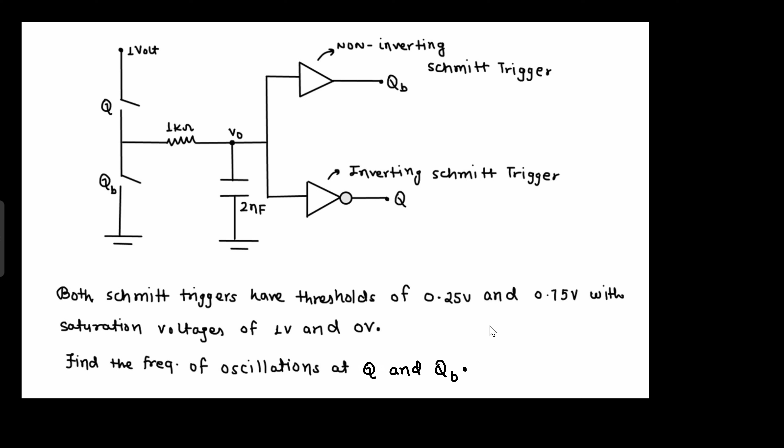So in this video we are going to solve a very good question on analog electronics, or you can say it will require the concept of transient analysis as well. So analog and network both combined are there. Okay. Now the thing is, there is 1 volt of battery. There are two switches, Q and QB switches are there.

Then there is this RC circuit, and the capacitor is having a voltage of V0, and that V0 voltage is fed as an input to non-inverting Schmitt trigger and inverting Schmitt trigger, and those non-inverting and inverting Schmitt triggers are giving Q and QB as output. So those Q and QB are running those switches. Are you getting this point?

So output of Schmitt trigger could be either 1 or 0. And what does that mean? If QB is 1 or Q is 1, that means switch is on. If both are 0, that means switch is off. Basically, Q equals to 1 will turn this switch on. If Q equals to 0, then it will be off. If QB equals to 1, then it will turn this switch on. If QB equals to 0, then switch will be off. So I hope the question is clear.

They have given the threshold voltage of Schmitt triggers as well, that is 0.25 volt and 0.75 volt. And saturation voltage is 1 volt and 0 volt. What does that mean? Their output could be 1 volt or 0 volt. You need to find the frequency of oscillations at Q, QB, or they could have asked at V0 as well. Now in this question, I did not give the characteristics. I have just written the name, non-inverting Schmitt trigger.

So yesterday I took a session on op-amp in positive feedback. There I told you it is not necessary that they will give you the characteristics. They can directly write down the name as well. In GATE 2021, there was a question in electrical. There they did not give the characteristics. They just told that it is an inverting Schmitt trigger, and then they gave the threshold voltages. That's it. And they also told the saturation voltages as well. So it is not necessary that characteristics will be given in the examination.

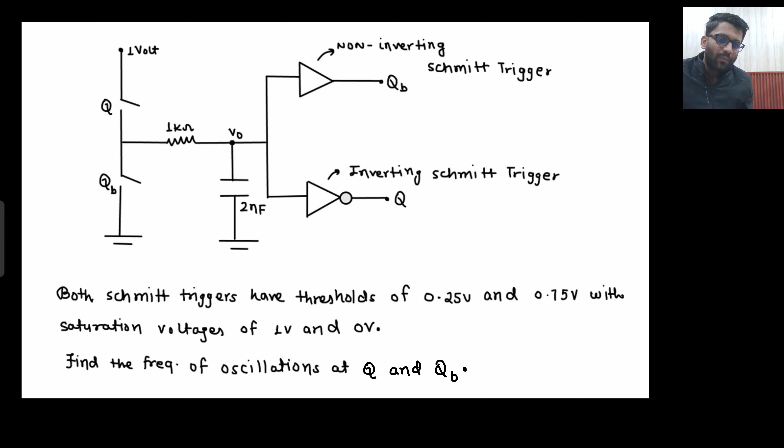Look here, the input of Schmitt trigger is V0, right? So here I am writing V0. And output of non-inverting Schmitt trigger is QB. So here I am writing QB. Are you getting this point? Then if it is a non-inverting Schmitt trigger, what do you mean by non-inverting Schmitt trigger? That for higher voltage it will give higher output, and for lower voltage it will give lower output. Right?

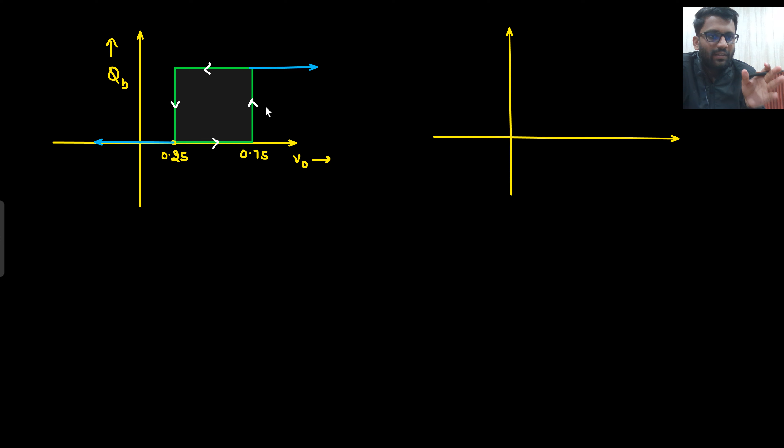In that manner. Okay. And what will be the direction of rotation? Since it is non-inverting, that means direction will be anti-clockwise. Let me use another color of pen. Non-inverting will have anti-clockwise direction, because I told you whenever we take angle we go anti-clockwise. Whenever we talk about nothing that is being inverted, that means if we are talking about positive, that means anti-clockwise.

So this is how I will make the characteristics, and here both signs of arrow will come. So this is the characteristics of a non-inverting Schmitt trigger, and you should know how to read these characteristics. That also I have told. You will work from here to here in this manner, and then you will work from here to here in this manner.

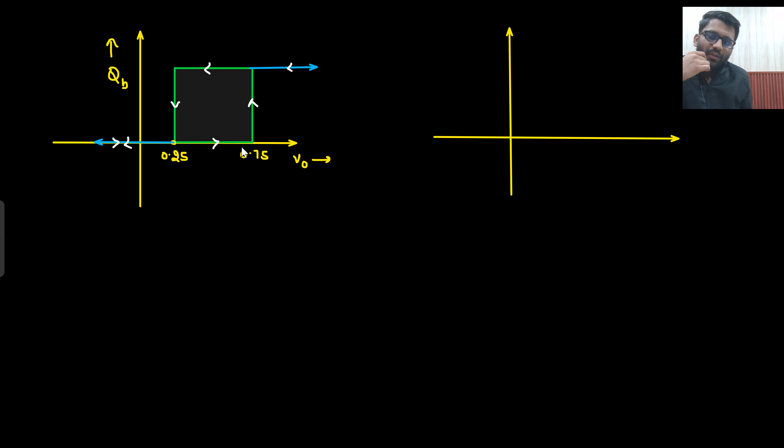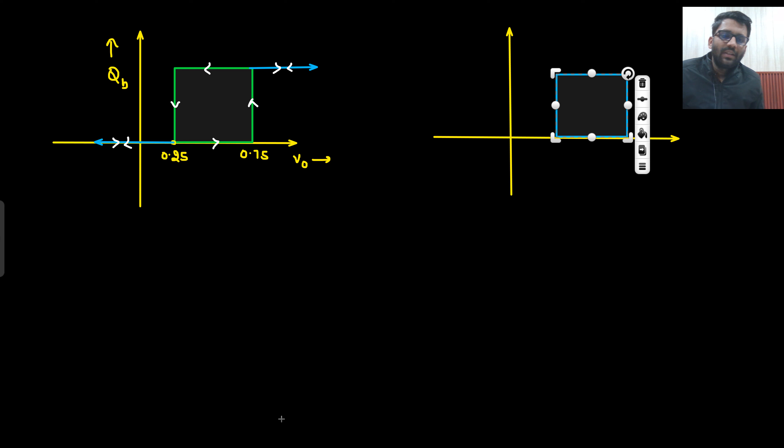Okay. Here both kinds of arrows are there, so both kinds of arrows we are making. Right. Now let's make the same for the inverting Schmitt trigger as well. For the inverting Schmitt trigger this will be the same, but this difference will not be there. Both will have the same threshold voltage, but the difference is that it is an inverting Schmitt trigger.

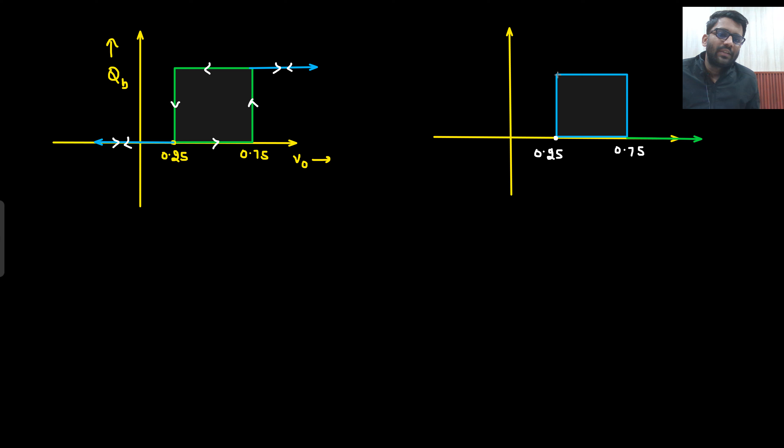What is the meaning of inverting Schmitt trigger? For a higher value of voltage you will get lower output, for a lower value of voltage you will get higher output. And how will the rotation look? It will be clockwise, right? Okay. And here both signs of arrow would be there. Positive output is 1, lower output is 0. So this is the characteristics.

Now what is the initial condition? Initially there is no charge on this capacitor, so this is having 0 volt. This 0 volt will be fed here, and here as well. So if input is 0 volt, that means if V0 is 0 volt, this guy is saying QB should go to 0, and this guy is saying that Q should go to... what is this output? This is your Q.

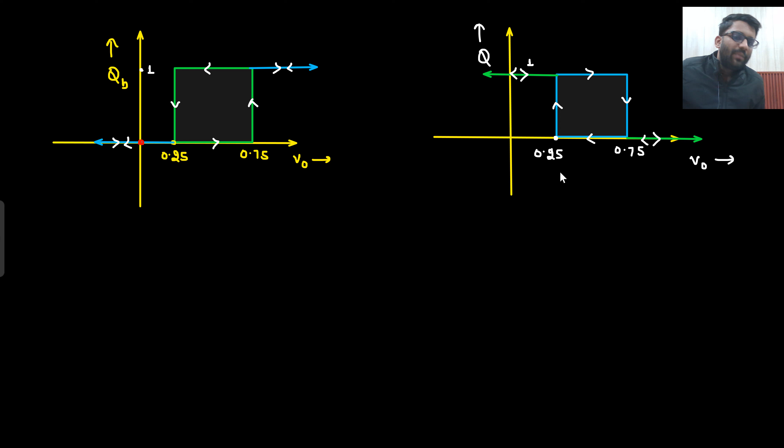Ambiguity will be there when you are in the dead zone. But now if your V naught is 0 volt, then QB is saying your output should be 0, and Q is saying that I should go to 1 volt. So at the initial condition, this guy is going to 0 volt and this guy is going to 1 volt.

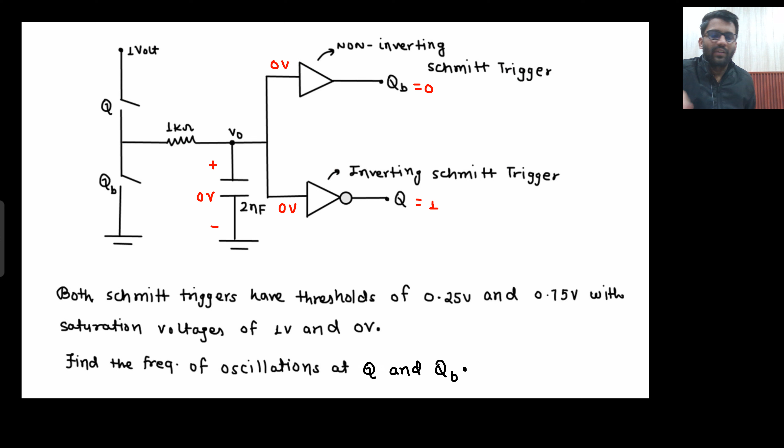Wait a second. What is the issue? Okay. Sorry, I just made it opposite, right? QB is saying to go to 0 volt. Yeah, and Q is saying to go to 1 volt. Okay, fine, it is fine only. So QB is saying to go to 0 volt, that means it should be open. And Q is 1.

That means it should be closed, this will turn on. Q is 1 means it will be closed, it will turn on. So now 1 volt will be coming here; basically this switch will be turning on now. Now what will this 1 volt do? Look, this will be made from an op amp, so this will drive 0 ampere current. These are ideal, so they are driving 0 ampere current.

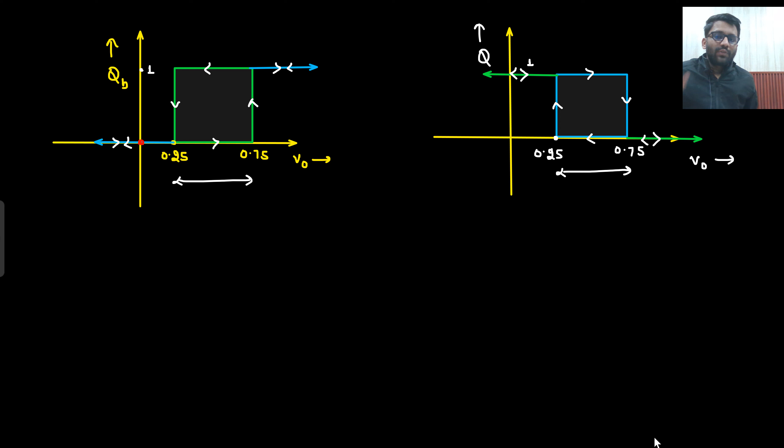So because of 1 volt, whatever current flows will flow from the capacitor only. So now this 1 volt will charge the capacitor, and the capacitor will develop some charge. That means your V naught is going up, from 0 to a certain value. So if your V naught is going up, you are moving in this direction now.

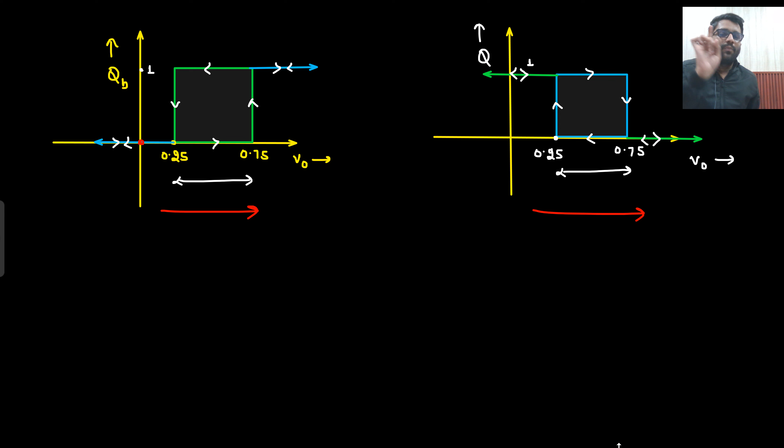So which characteristics will you follow? If my V naught is going up, this characteristics I will follow. Here I will follow this characteristics and here I will follow this characteristics. So what are both of the characteristics saying? Both are saying that the transition will be at 0.75.

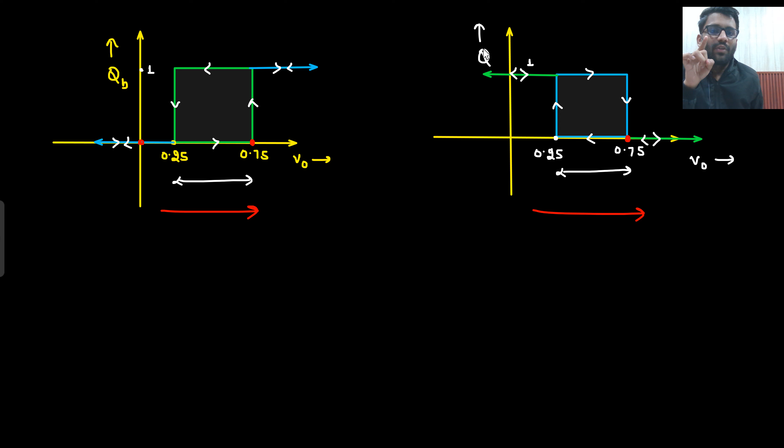So both of the characteristics are saying that if your V naught is 0.75, at that point there will be a transition. Until you reach 0.75 volt there will be no transition. That means till that point your Q will be 1 and QB will be 0 only. Say yes or no. Right? All good? All fine? Okay.

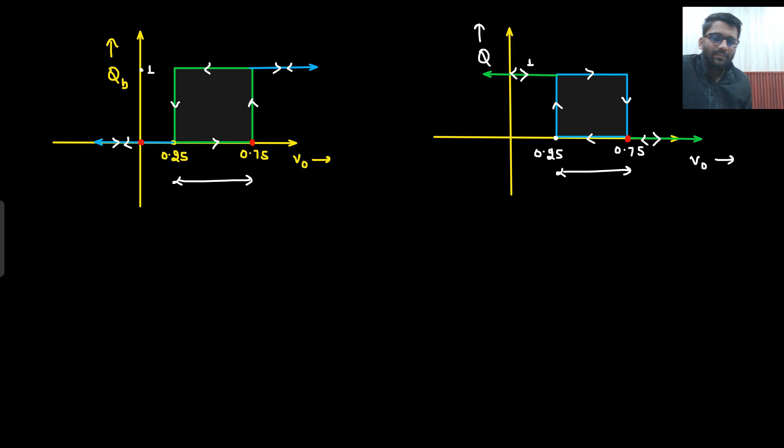So now the scene is, your V naught will start developing the voltage. Your capacitor can see that 1 volt is applied. So your capacitor will start developing the voltage.

It will try to go up to 1 volt. So your capacitor will try to go up to 1 volt. And what is tau here? Tau is RC. 2 nanofarad, 1 kilo ohm. That will be 2 microfarad. Sorry, 2 microsecond. So this will be the same.

But there is a transition at when your V naught becomes 0.75 volt. So till the point 0.75 volt we need to analyze, because after that there is a transition. That means after that the circuit condition is changing. After that what will happen? QB will say that I will be 1 and Q will say that I will be 0.

That means QB will say that now I will be turning on and Q will say that I will be turning off. So circuit condition will change. So capacitor equation will also change. So until the point we reach 0.75 volt, till that point we need to analyze it. Are you getting this point or not?

Here the concept of multivibrators is being used, but don't think anything. Even if you don't know what a multivibrator is, still you will be able to solve the problem, because this is a simple RC circuit, charging, discharging. Multivibrator is nothing but a Schmitt trigger with an RC circuit, nothing else. That's why I took this question, so that your concept of multivibrator gets cleared.

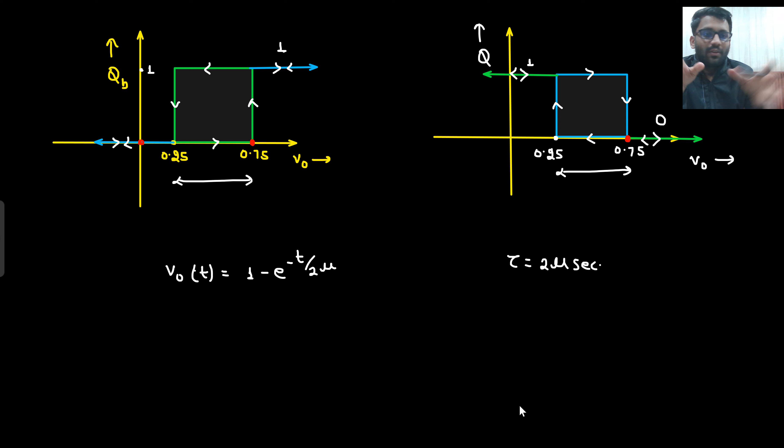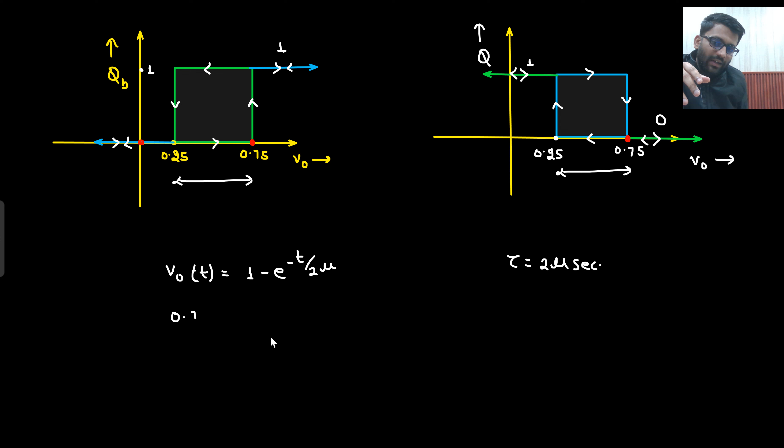So what is happening here? Until you reach 0.75 volt, there is no change in the circuit. That means capacitor is getting charged. But after 0.75 volt, there is a change in the circuit, so circuit condition will change. After that, we need to analyze again. So now capacitor is developing the voltage. But till what point? Until it reaches 0.75 volt. Okay.

So now till what time? This time you can calculate: ln 4 into 2. So this time is 2.77 microseconds. So what do you see? Initially your capacitor is getting charged. Your V naught is getting charged, and it was charged till 0.75 volt.

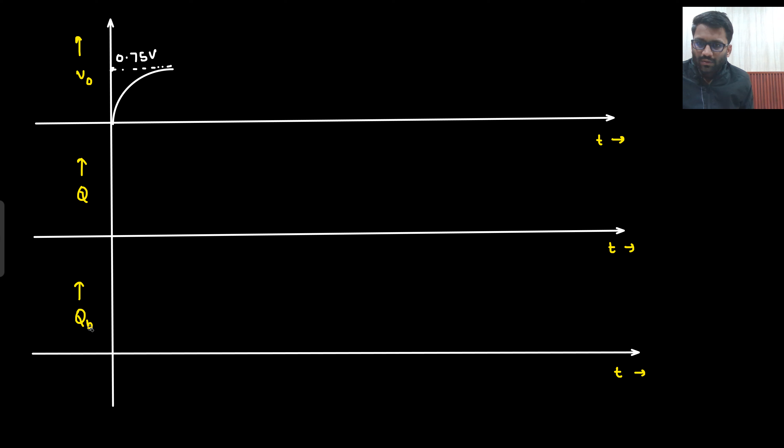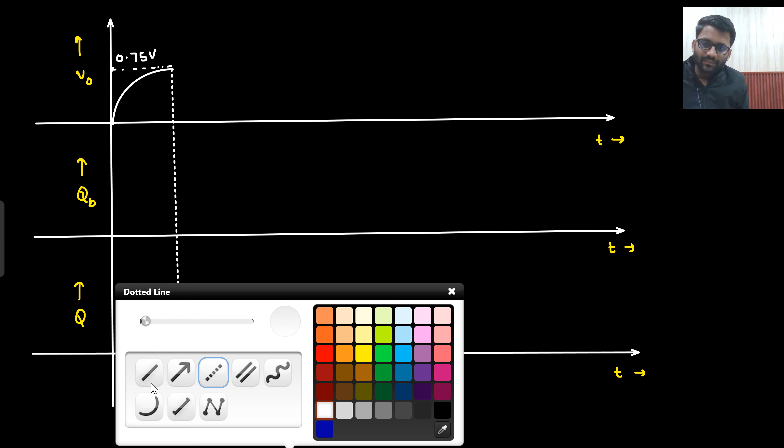And in this condition, what was the condition? Your QA was 0, I guess. Sorry, QB was 0 and Q was 1. This is your QB and Q. So till this particular point, your QB was 0 and Q was 1. Right? Let's see what happens next.

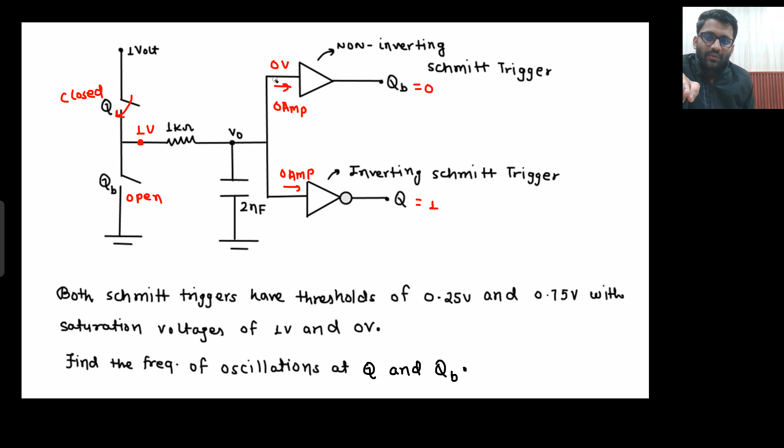Now, just as it goes above 0.75, now the capacitor is charged to 0.75. Okay, let's remove this 0 volt. This I already know will drive 0 ampere current. Let's remove this off as well. So this 1 volt was there, but now it is charged to, let's just say, 0.76 volt. So now at 0.76 volt, what will happen?

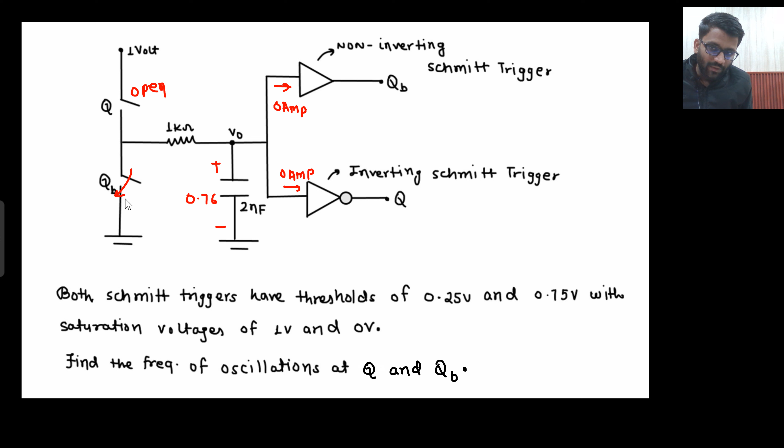At 0.76 volt, QB will say, sir, I will be 1, and Q will say, sir, I will be 0. That means Q will be open now, and QB will be closed. So now here only 0.75 volt reached. 0.76 did not reach. After 0.75 only, they started saying I will be open and I will be closed. Now what is the equivalent circuit here?

This end of the resistor is connected to ground, right? So this has become a simple RC discharging circuit. Now from the capacitor, current will flow and it will discharge the capacitor. This is the only path, because the input of the op-amp will drive 0 ampere current. So the capacitor will discharge through 1 kilo ohm only.

So now it will keep on discharging. That means my V0 is going low. Capacitor will try to discharge completely. So from 0.75 volt, it will try to go to 0.

But will it be able to reach 0? Let's check that out. So what will happen? Now your input is decreasing. Now you are going from 0.75 volt to 0. So that means you are moving in this direction. So which characteristics will you follow? This characteristic you will follow. You are moving in this direction, right? So this characteristic you will follow now.

So in this characteristic, where is the transition? The transition is at 0.25. This characteristic was there, and here this characteristic was there. So where is the transition? The transition is at 0.25. Right? So now your V0 will go down till it reaches 0.25 volt. So initially, at 2.77, your V0 is having 0.75 voltage.

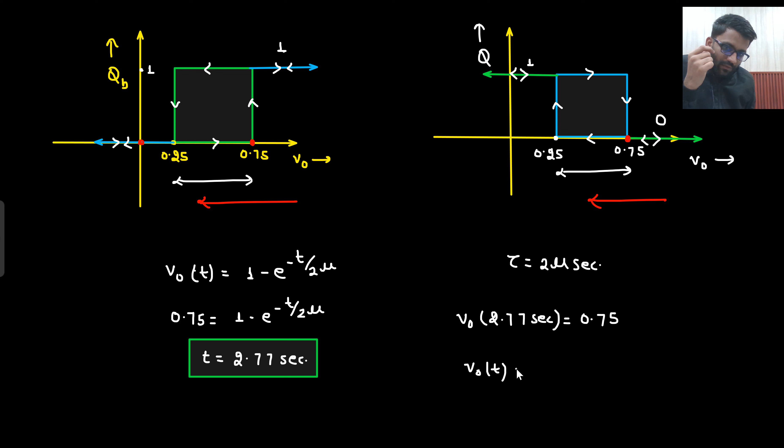Now what will be the equation of V0? V0 will try to go from 0.75 voltage to 0 voltage. So this will be the discharging equation. It will try to go to 0 voltage, but from where are we starting our circuit? We are starting our circuit from 2.77 microseconds. Since we are starting our circuit from 2.77, here I will put 2.77 microseconds.

Although it is not required to put this 2.77 microseconds, you can solve with respect to t as well. In the examination, we will solve with respect to t only. Basically, from 0.75 you need to go down to 0.25 volt. So how much window of time do you require? Based on that you can solve. So what was the time constant here? It was 2 microseconds. So till what point will it go? Till 0.25 it will go.

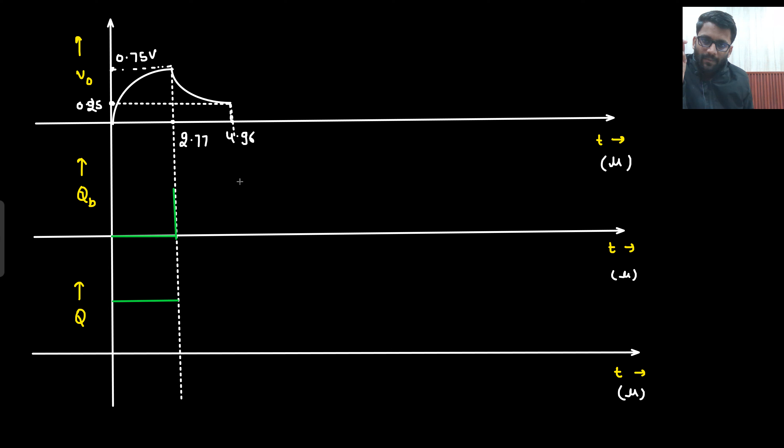So now in this window your QB was 1. In this particular window your QB was 1, but your Q was 0.

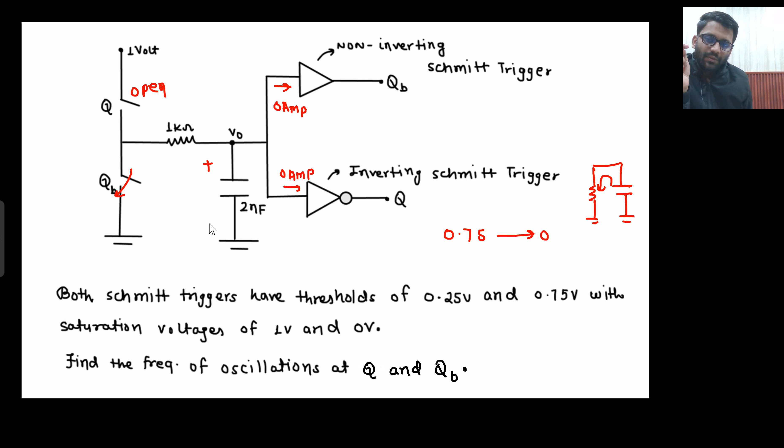Okay. Now what will happen? Let's just say your V naught was going down, and it has reached 0.24 volt. If it has reached 0.24 volt, then what will this characteristic say? 0.24 volt will be here. So this QB will say that I will go to 0, but this Q will say that I will go to 1. That means now the switch will be turned on, and this will be off now.

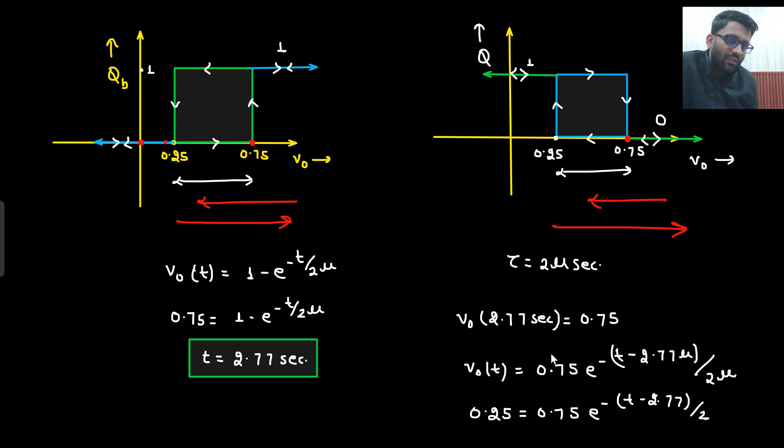What will happen now? This 1 volt will be coming here, but this capacitor is already charged to 0.25 volt, right? So now the V naught value will go up from 0.25. If it is going up, then which direction do I need to follow? This direction I need to follow. Since your V naught value is going up, that means the input of the Schmitt trigger is going up. So now I will follow this characteristic, right?

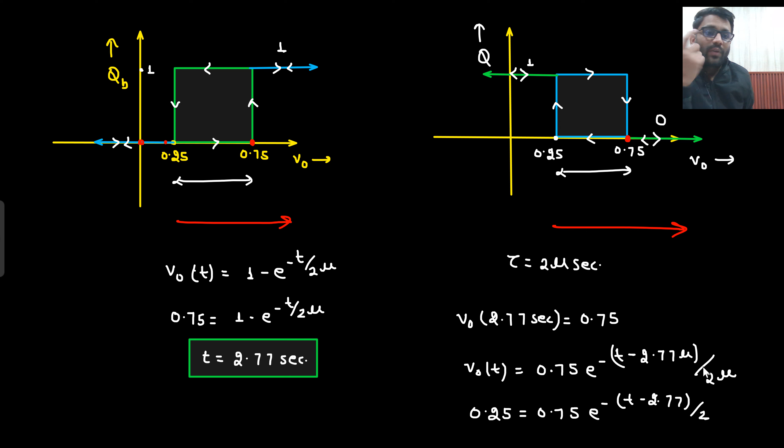Which characteristic am I following? This characteristic I will follow. So in both of the characteristics, where is the transition? The transition is at 0.75. The capacitor will say that I want to charge up to 1 volt. But these characteristics will say that you can charge up to 0.75 only, because after that the circuit conditions are changing. After that, again QB will be 1 and Q will be 0.

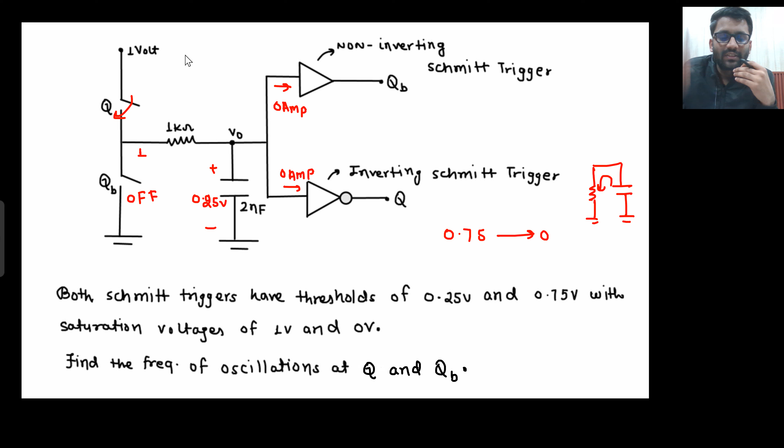That means again this will be on and this will be off. So are you getting to know what is happening with the switches? On off, on off, on off. At one time one is on, at the other time the other one is on. One is charging the capacitor, the other one is discharging the capacitor. So there is a kind of oscillation, and that frequency of oscillations is what they are asking.

So now in the next cycle you will be able to understand what is happening. You need to go from 0.25 to 0.75, but you are trying to go to 1 volt. The capacitor will say, sir, I will try to go to 1 volt, and my initial condition is 0.25. So what will be the equation? You should be in the habit of writing down these equations.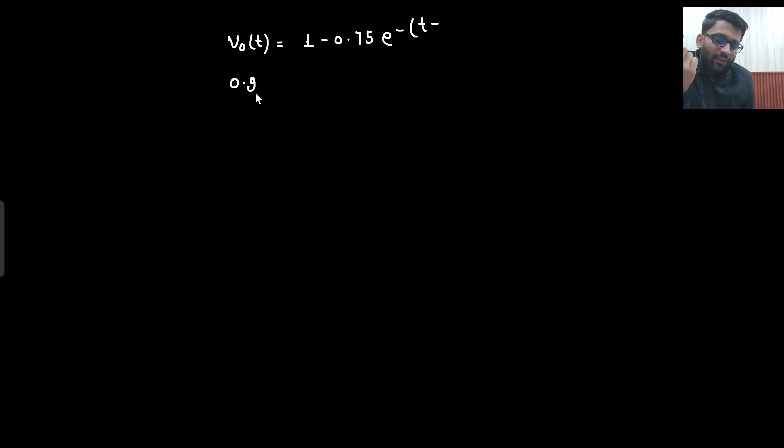So the capacitor is saying that I will start from 0.25 volt and I am trying to go to 1 volt, right? But in between, at what point will it stop? At 0.75 volt it will stop, because after that the circuit condition will change. Say yes or no? Sorry. It is okay, it is rising. Sorry, where will it stop?

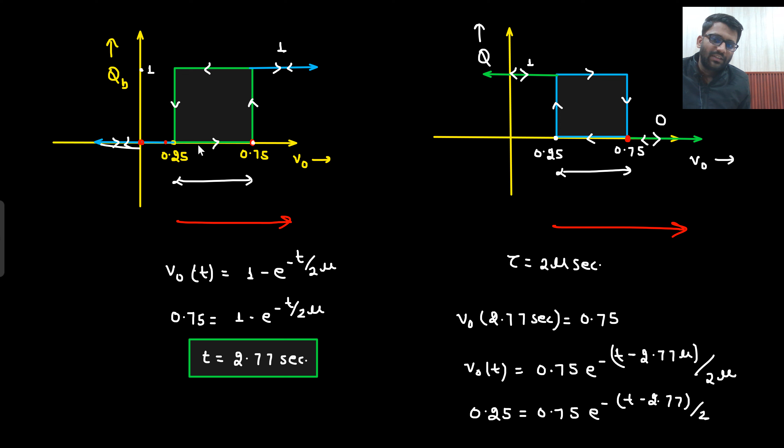At 0.75 it will stop, because after 0.75 volt, where is the transition? The transition was here, no? At this point the transition was there, because now the input is increasing. If the input is increasing, that means the transition is at this point. So when you reach 0.75 volt, it will stop.

Here what are you going to write? From where are you starting your circuit? You are starting your circuit from 4.96, divided by your time constant, that is 2 micro. Okay. So now I can solve this equation and I will get the value of T from here. So this I need to equate to 0.75, and this is how I will solve it.

So 2 ln 3 plus 4.96, 7.157. So the T value I am getting is 7.157. Okay. So basically what is happening here? Now this is getting charged. Till what point will it charge? Till 0.75 volt it will charge. Then again we will get the same circuit condition, the same condition that you got here.

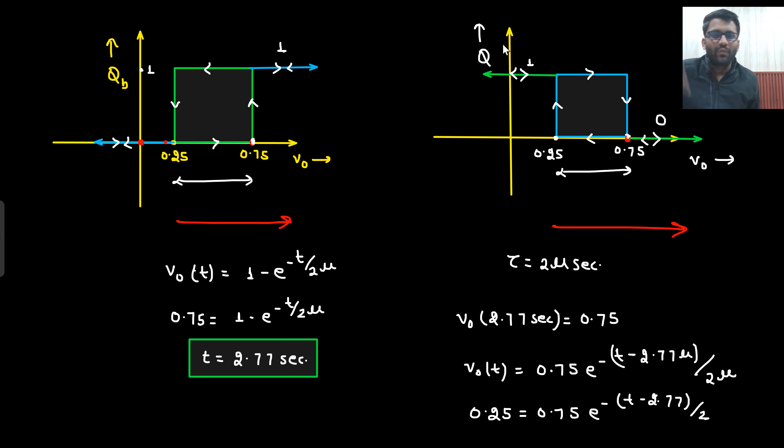Now what will happen after this point? Till this point, your QB is off and your Q is on. That means the capacitor is getting charged. But since you have reached 0.75 volt, what will happen after that? Let's say the next condition is 0.76 volt. At 0.76 volt, QB will say, sir, I will go to 1, and Q will say, sir, I will go to 0. So if Q is going to 0, this will be off and this will be on. That means the capacitor will discharge.

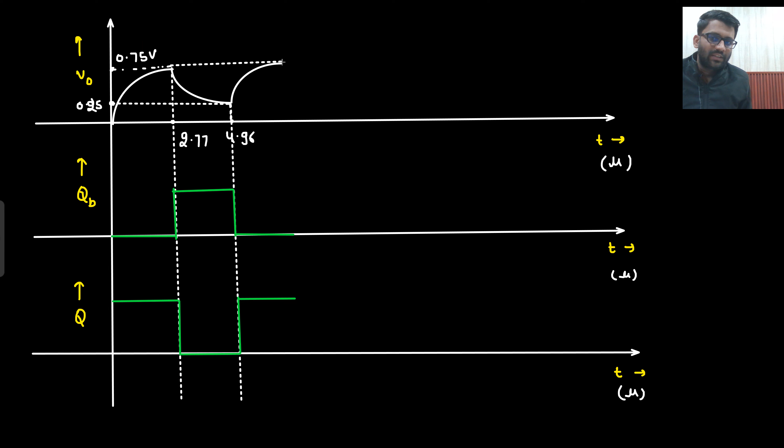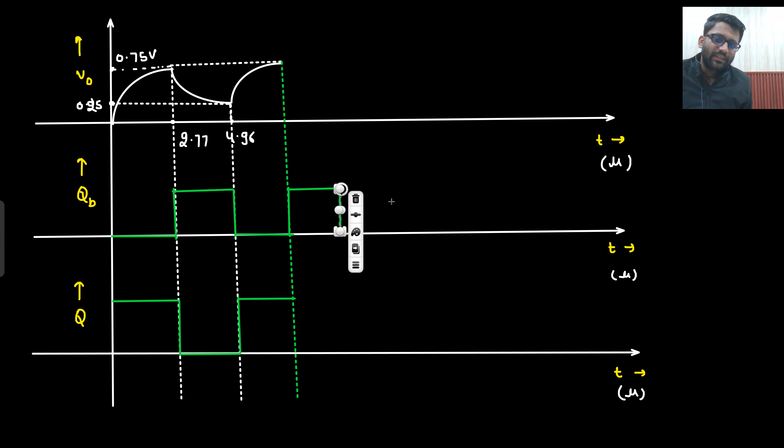So again the capacitor will discharge, but it can discharge up to 0.25 volt only, because after that the circuit condition changes again. So now you are able to read the characteristics, understand their meaning, and in that manner solve the problem as well, right? So now you can see there is constant charging, discharging, charging, discharging. So this will be your steady state cycle. Okay.

They are just asking the frequency of oscillations, which is pretty easy. So which window did we get here? We got the time window to be 7.157. So this is your time period, right? This is not the steady state. This was just the one state. After that, this is the steady state.

Actually, what will happen is that now it will not go below 0.25, right? It will not go below 0.25, then till 0.75, then again in this manner. It will keep on following this path, right? So this window is being repeated.

7.157 minus 2.77, so that is 4.38. 4.38 microseconds we are getting. So this is the time period, that is 4.38 microseconds. And if they are asking the frequency of oscillations, just take the reciprocal. So 227.93.

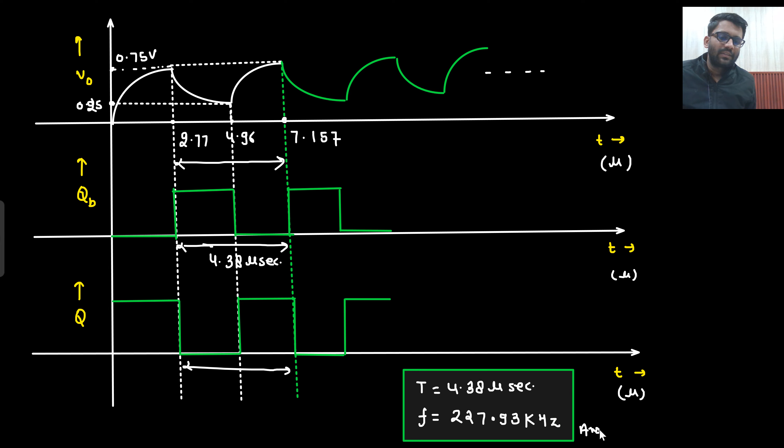227.93 kilohertz. So this is the frequency of oscillations. So this is the final answer. A very good question it was. Okay, and I hope you enjoyed the analysis. So this is how it will go.

So you should know how to draw the characteristics of non-inverting Schmitt trigger. Again and again I am saying, in the examination it is not necessary that they will give the circuit. It is not necessary that they will give you the characteristics as well. They can just mention the name and they can give the threshold voltages and the saturation voltages. So it should be you who needs to draw the characteristics, and it should be you who needs to understand the graph, how it goes.

So in the last video where I taught Schmitt trigger, there I told you how to read these graphs. So this is where we started from. We did not start from Schmitt trigger. We started from here, how to read these graphs. Then we went to Schmitt trigger because our target was to make these graphs using Schmitt trigger. So that we made. And then there is another concept, that is of astable multivibrators. So that is the same kind of concept.

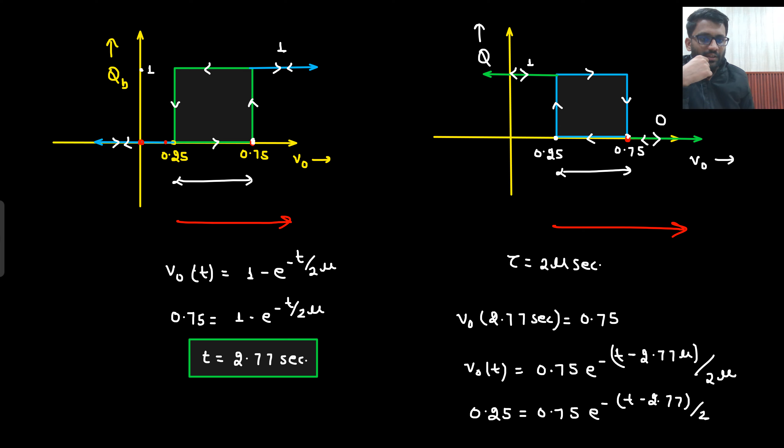You will use a Schmitt trigger there, and then you will apply an RC circuit there. And then the capacitor will charge and discharge, and based on that your output will keep on oscillating. And if your output keeps on oscillating, it will be an oscillator, and based on that they will ask you the frequency of oscillations. So you can analyze the circuit. Now I hope I have given enough concept. Since this was a revision video, these were revision concepts. So I don't think I need to bring another video based on astable multivibrator. So now you can analyze it on your own.